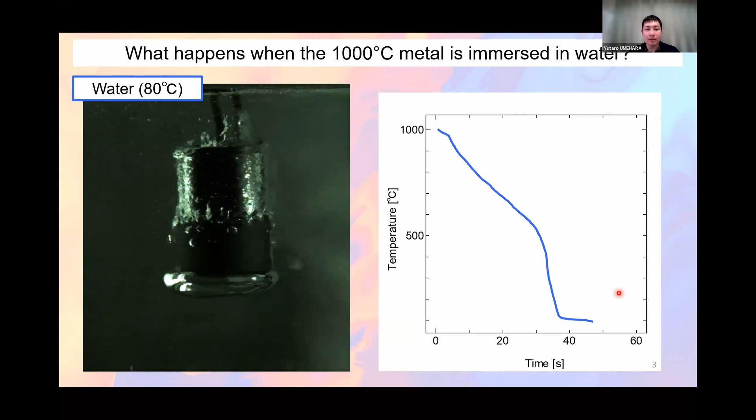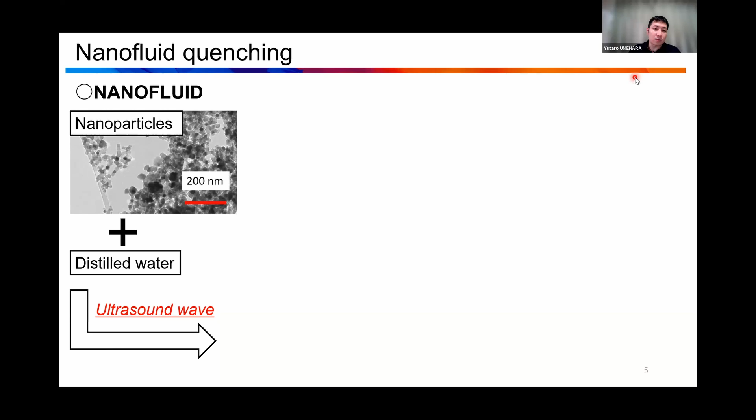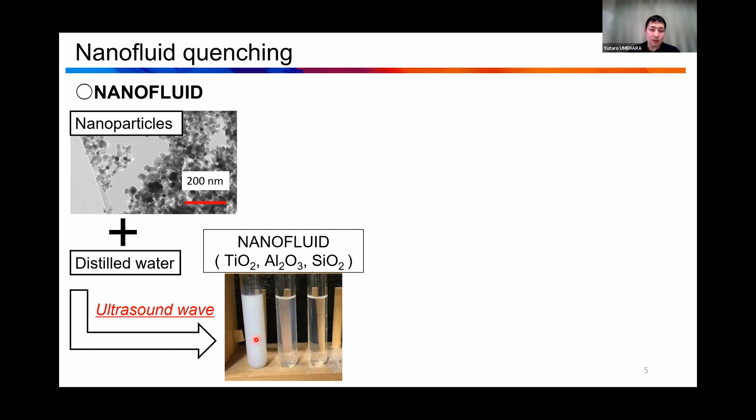Okay, so the first topic is this one, quench phenomenon in nanofluid. In a nanofluid, particles are dispersed in distilled water or oil or something. We made a nanofluid by using ultrasound waves to disperse nanoparticles in the liquid. These are titania, alumina and silica.

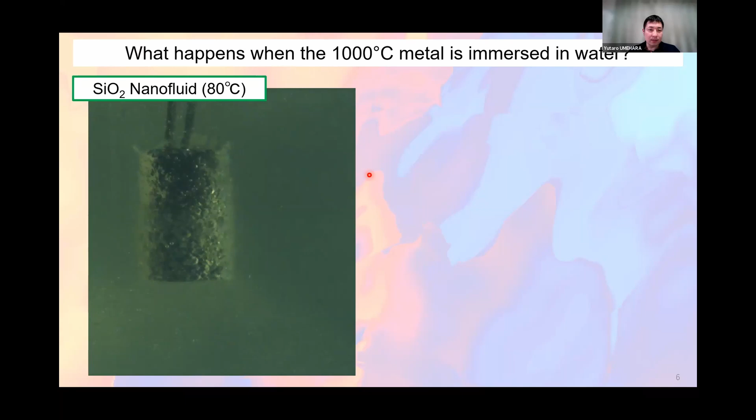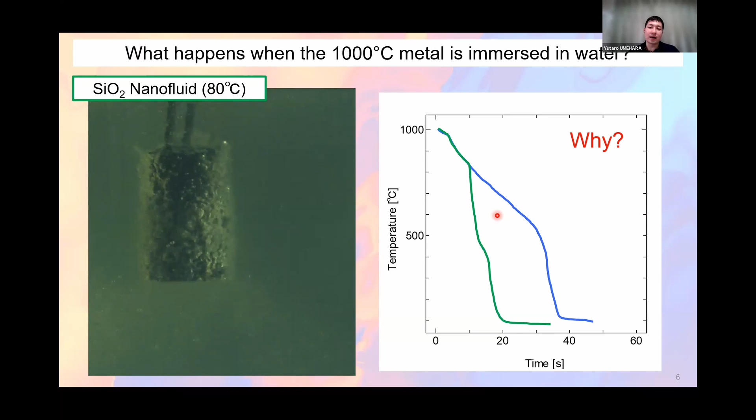So the next video focuses on quenching in a silica nanofluid. When a 1000-degree stainless steel rod is immersed in the silica nanofluid, the initial condition is film boiling. It's almost the same as the water case, and the vapor film covers the surface. But after that, suddenly the vapor film collapses to one point, and small bubbles are generated from the outer surface. So the cooling curve is like this: film boiling, and then suddenly the cooling rate is enhanced. So the research question is: why does this phenomenon occur in a nanofluid?

The reason is surface conditioning. Before quenching starts, the stainless steel rod looks like this, but when we repeat the test, heating up and cooling down repeatedly, the surface condition also changes.

So a nanoparticle layer is deposited on the surface during the boiling case. The nanoparticles are dispersed in a liquid, and during the cooling case, a bubble comes out from the solid, and the nanoparticles aggregate in the very thin liquid film layer, and then a nanoparticle layer is formed. So when we repeated the test, the nanoparticle layer formed like this.

So the main reason for the rewetting quenching phenomena is the nanoparticle layer. But why can the nanoparticle layer reduce the cooling time? So this is one mechanism. In the bare surface case, during film boiling, sometimes liquid-solid contact occurs, but heat comes from inside the high temperature surface, and then liquid boiling occurs, and then the vapor

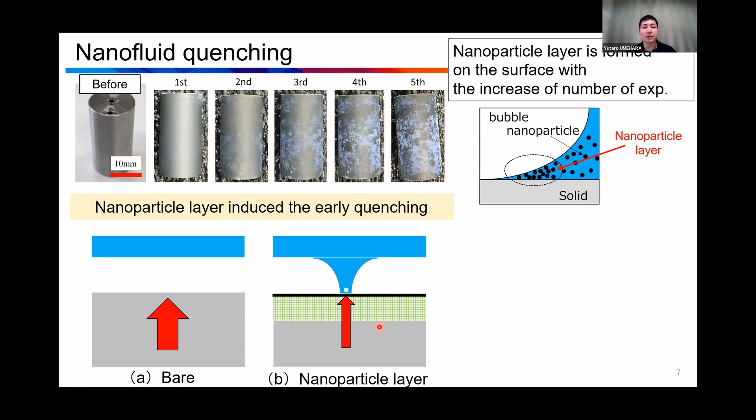film comes back. But when we apply the nanoparticle layer on the surface, liquid-solid contact occurs, but heat doesn't come so much because the nanoparticle layer has low thermal conductivity. So the liquid-solid contact is longer than in the bare surface case. Finally, the small bubble or film is collapsed. So the mechanism is the low thermal conductivity of the nanoparticle layer, and also the increased thickness is the main reason.

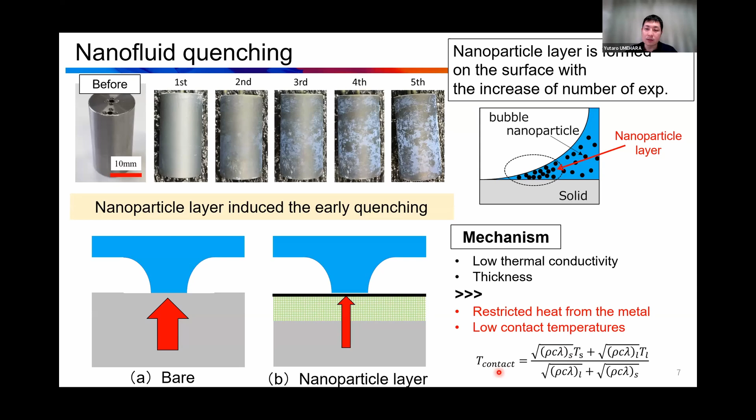Finally, the thickness and the low thermal conductivity of the nanoparticle layer restrict the heat from inside the metal, and then we get a low contact temperature. This is the main mechanism of the reduction of the cooling time when we use the nanofluid. The contact temperature is like this. Here is thermal conductivity. When we get a small value, we get a low contact temperature. And this low contact temperature induces rewetting quenching.

Okay, so a little bit of a change of topic: quenching phenomena in Japan. The Japanese sword is really important for quenching phenomena. Maybe someone knows the Japanese sword. The Japanese sword has a pattern on this side. This pattern is made by the quenching phenomena. When we make the Japanese sword, we add clay on the surface. This clay is very important to make the pattern. So this clay is like a nanoparticle layer. It has a very low thermal conductivity, so it can induce

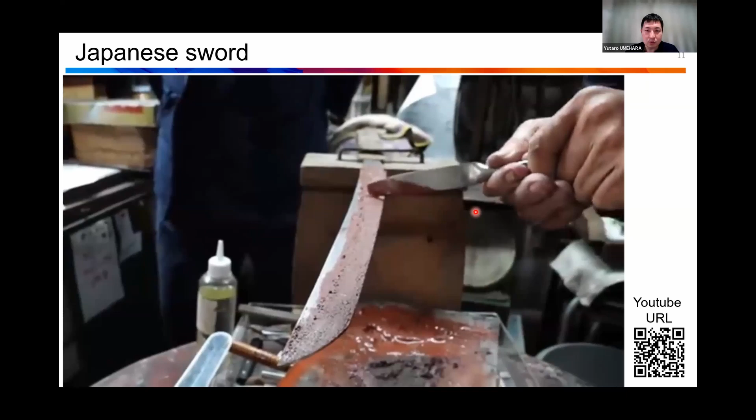rapid cooling. But they didn't just make the paste. They added a pattern on the surface. This pattern is very important to make the pattern of the sword. And they also chose a different material on the surface. This red one is the same, but they made some pattern. After that, they chose a different clay for a different side, because the spine side needs toughness, but the blade side needs hardness. So they chose clay with different thermal conductivity added on the sword.

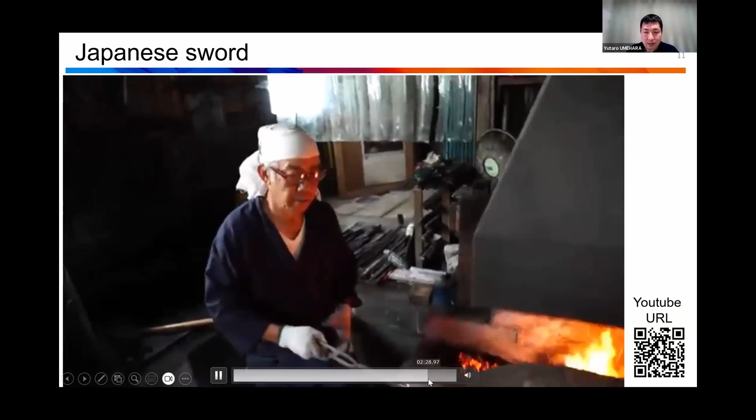And they also changed the thickness. After that, they heated up the Japanese sword to 1000 degrees C, and then quenched it completely in a water bath. So this quenching phenomena is very important to make a great Japanese sword, and also the clay pattern on the surface is very important to make this pattern on the sword. Okay, so this is quenching phenomena in Japan.

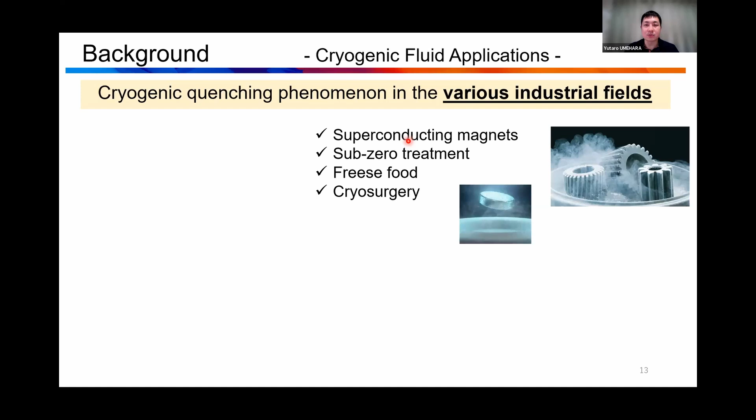Okay, let's move to a different topic. This is a recent research result on quenching phenomena in cryogenics. Cryogenic fluid applications can be found everywhere in various industry fields, such as superconducting magnets, heat treatment, food, or something like that. Especially, a liquid fuel rocket also needs to use cryogenics. Here is an image of the SpaceX engine, and here is liquid oxygen and liquid methane.

Those are cryogenic. So they need to transport them from the tank to here. The pipeline needs cooling down to the saturation temperature of the cryogen. And they also need to cool down all these components to the saturation temperature. So they need to spend so much waiting time for the fill of fuel. And they also need to use a large amount of consumption to cool down each component. So we need to improve the cooling condition with some surface modification, something like that.

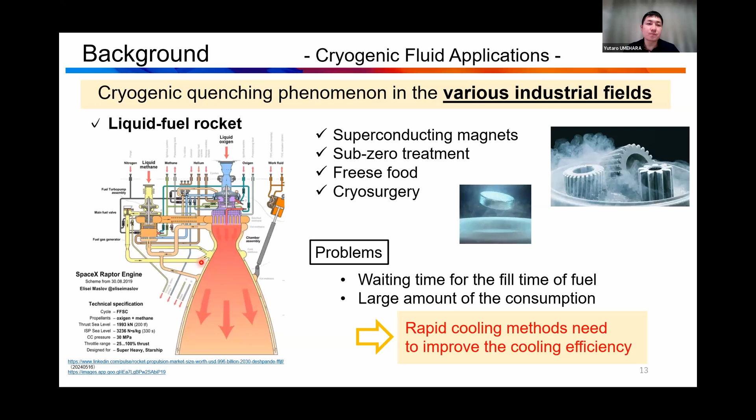So, previous research reported ways to improve the rapid cooling method and the cooling duration when using cryogenics. They reported anodic aluminum oxide: this is an aluminum substrate, and they added the anodic oxide. This nanoporous layer is very important to the enhancement of the cooling phenomena.

So this is the bare surface case, and the cooling curve is like this. And this is the boiling curve. But when we added this AAO surface, we can reduce the cooling time by 46%. And the boiling curve is here. This point is moved to the higher temperature point, and this is a 45% enhancement.

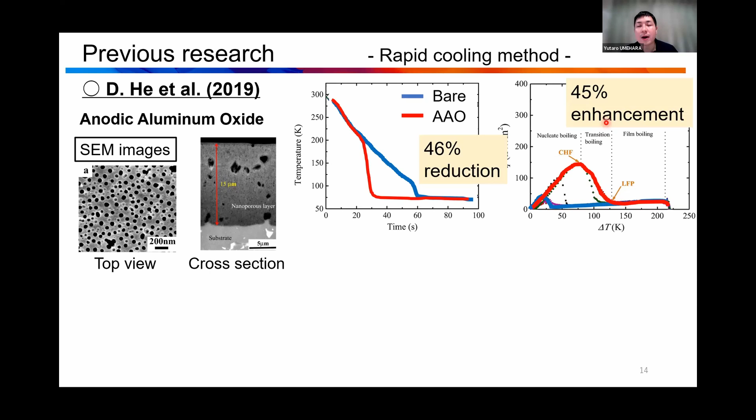So they reported that the mechanism of this is based on the contact temperature. Aluminum and the AAO surface have totally different contact temperatures because AAO is a porous layer, so it has low thermal conductivity. Finally they can get this kind of low contact temperature. So they reported this is the main mechanism of the rapid cooling.

But our research proposal is to develop a different rapid cooling technique by using the copper porous plate. So this one is a copper porous plate. This copper porous plate can enhance the critical heat flux. They also tried to use it to improve the cooling phenomena. This is the same image. This part is the porous part, and they also have big pores in the surface. So we try to use this to enhance the cooling characteristic.

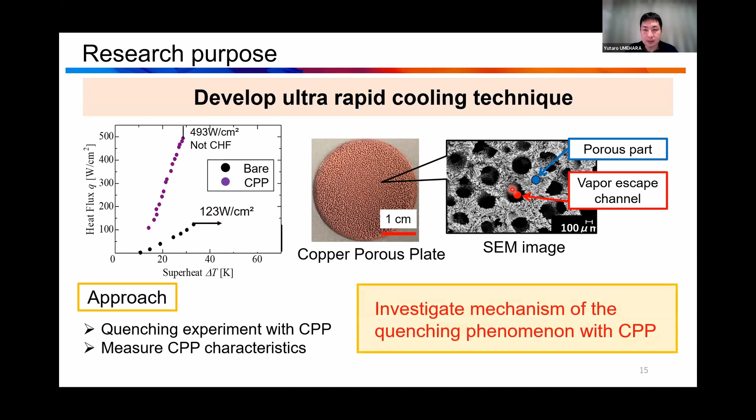So this is how to make the copper porous plate. We use an electrodeposition method. This method is usually used for plating, when we cover a metal with a layer of the same metal. Usually in plating they apply a very low current, but in our case we applied a very high current. So finally we get hydrogen bubbles from the cathode and the anode like this. At the cathode, copper flake is deposited on the surface, and hydrogen bubbles come out from this cathode. And finally, we get a kind of copper porous plate.

So this one is an actual video of making the copper porous plate. Hydrogen bubbles are coming out from the cathode, and finally we get this porous plate. So we apply this porous plate to the sample.

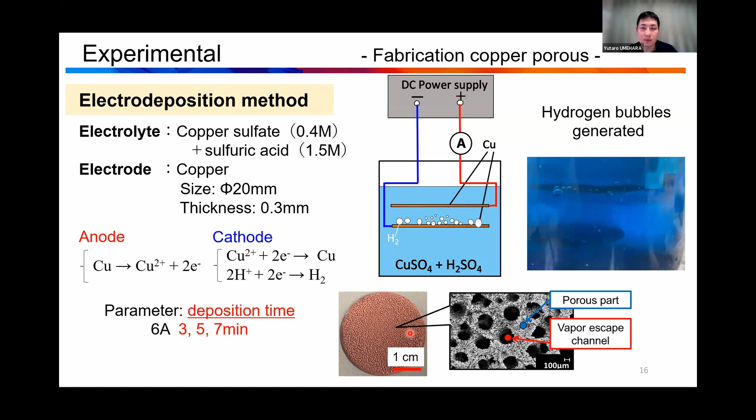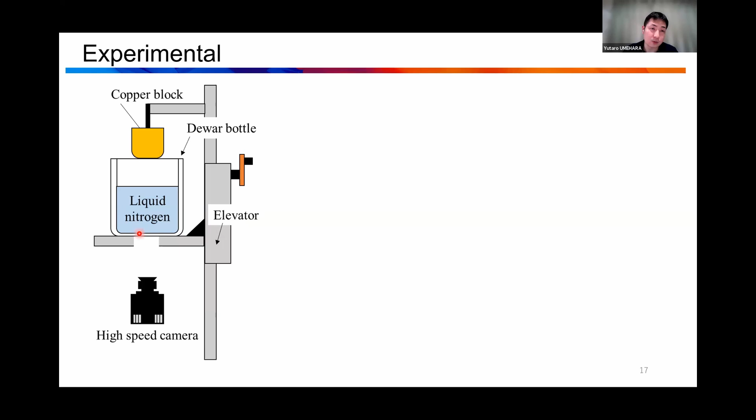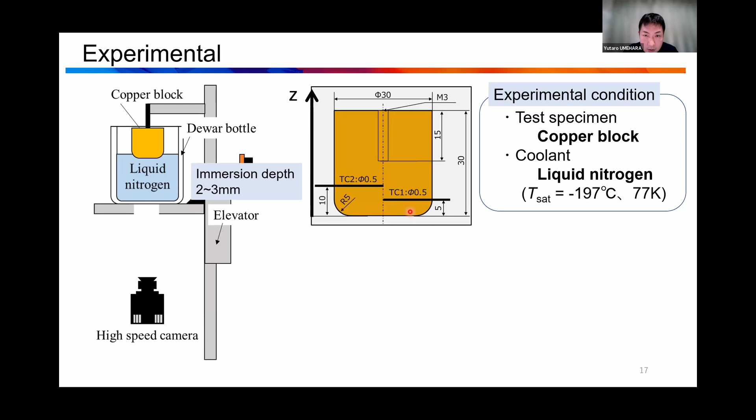So this is the experimental process. It's very simple. This is a Dewar bottle, and the liquid nitrogen is poured in here. And we use a copper block as the test specimen. The Dewar bottle is flat on the bottom surface to visualize quenching phenomena. The schematic design is like this, and we inserted two thermocouples in the middle part, here and here. During the experiment, the immersion depth is 2 or 3 millimeters, and we added the copper porous plate on the bottom surface using soldering adhesion.

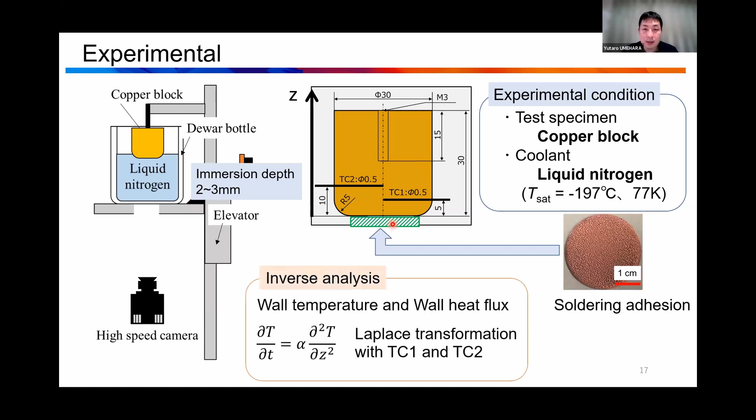And then we calculate the wall temperature and the wall heat flux by using inverse analysis, and we use a Laplace transformation to calculate them. So here is the experimental result, temperature versus time, and the bare surface case is like this. We spent almost 30 minutes cooling down to the saturated temperature of liquid nitrogen.

And then the next one is here. This one is a copper plate; we just added a copper plate. The thickness is 1.5 millimeters. In this case, we can reduce the cooling time by 40%. And then we added different copper porous plates, like this. We changed the deposition time to make the copper porous plate: 3 minutes, 5 minutes, and 7 minutes. When we increase the deposition time, the thickness also increases, but porosity doesn't change much. This one is a very good result: we can achieve a 90% reduction of the cooling time.

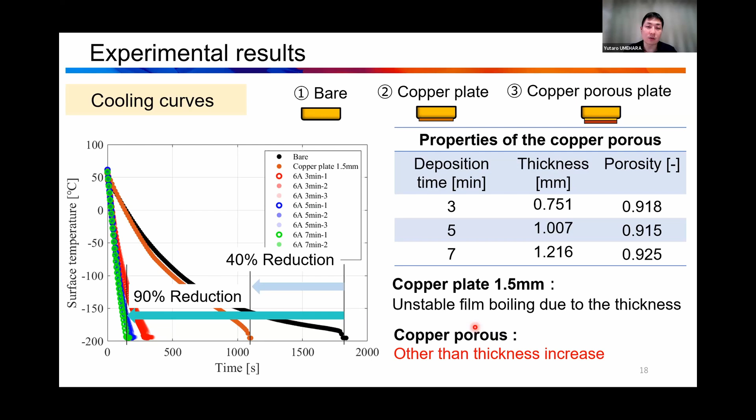Okay, so in the copper plate case, maybe the edge has some effect to reduce the cooling time, with unstable film boiling due to thickness. But in the copper porous case, the thickness is thinner than the copper plate, so maybe this effect is not so much. So maybe there is a different effect that improves the cooling characteristic.

Okay, the next is a boiling curve, heat flux and wall superheat. The black one is the bare surface case, and this brown one is the plate. So the heat flux doesn't change when we add this copper plate.

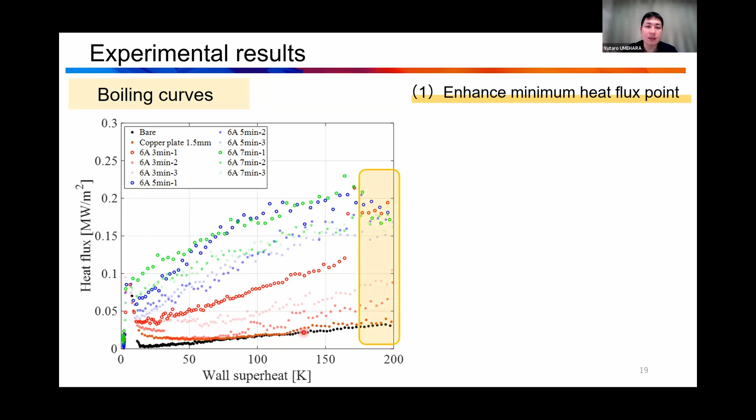But when we immerse the test specimen with copper porous, we can see a high heat flux just when it is immersed, when it has just started. Very high heat flux we can see, and then the next point is this point, the high wall superheat case. The bare surface has a very low heat flux, but the copper porous case has a very high heat flux, as it shows. So these two points are very important to reduce the cooling time.

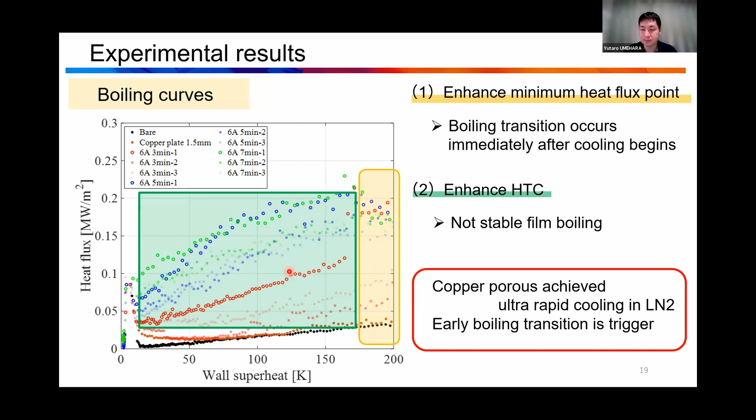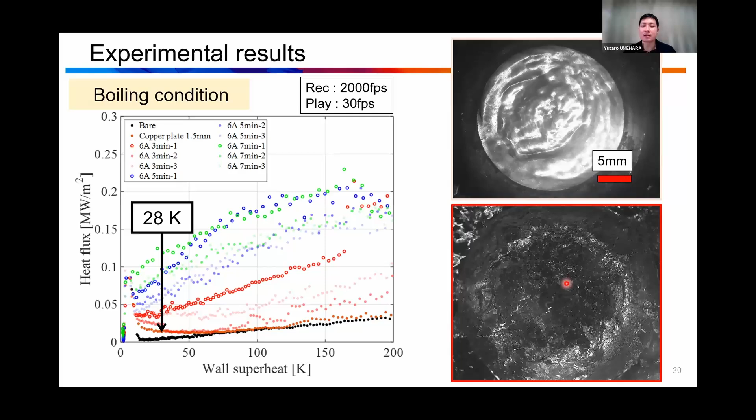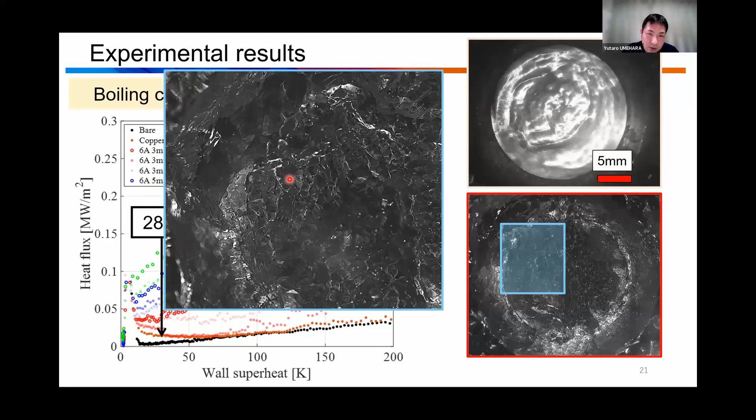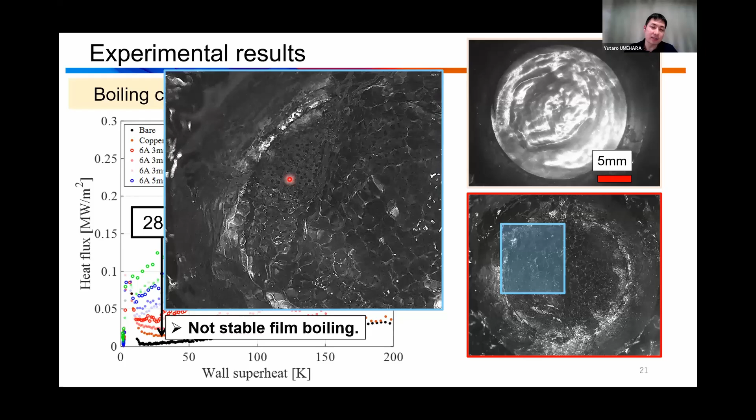At some point liquid-solid contact occurs, and then the vapor film is generated, but repeatedly liquid-solid contact, vapor film cover, liquid-solid contact, like this. So this is an expanded image. At some point liquid-solid contact occurs, but after that the vapor film suddenly comes out. So not stable film boiling, but for some duration they have some film boiling.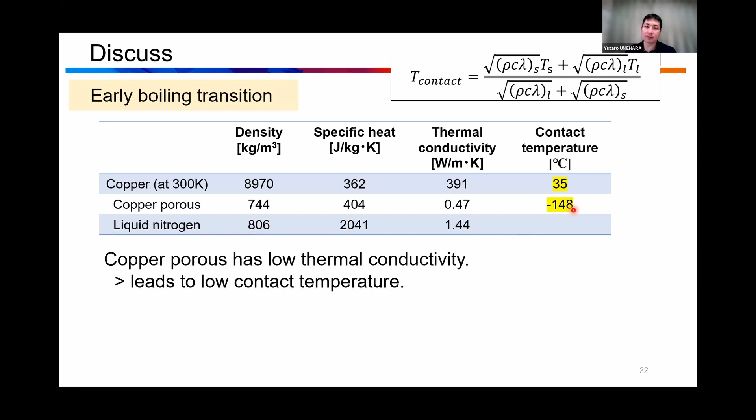So we try to understand the mechanism of this rapid cooling in quenching when we use copper porous. This one is the property of the copper, the copper porous, and the liquid nitrogen. Based on these properties, we calculated the contact temperature. In the copper case, the contact temperature is 35 at the initial temperature. But when we use copper porous, the contact temperature is very low. So this low contact temperature may have some effect on the rapid cooling.

But when we use different deposition times, 3 minutes and 5 minutes, the cooling time also changes a little because the heat flux is a little enhanced. So the next question: how does deposition time affect the rapid cooling? This is the same image when we make different deposition times. The pore size changes a little, and the thickness also changes a little.

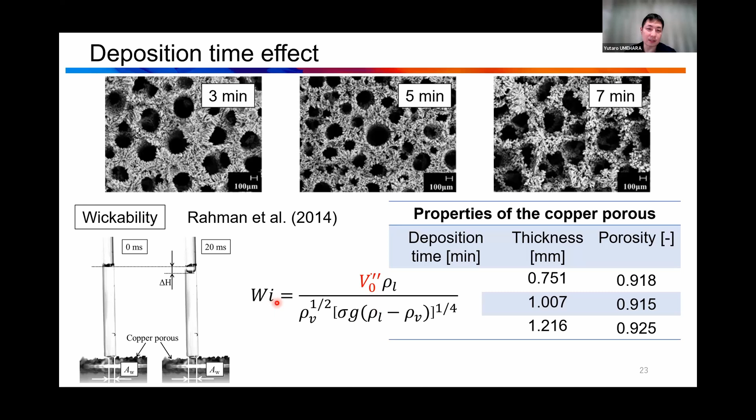So maybe various surface conditions also change, but we focus on the wickability of the surface. So we measure the wickability. For wickability, we attach a capillary tube on the surface, and the liquid level changes due to the capillary force of the copper porous. So this speed and time change, we measured, and this is the volume flux, and then finally we get this wickability value.

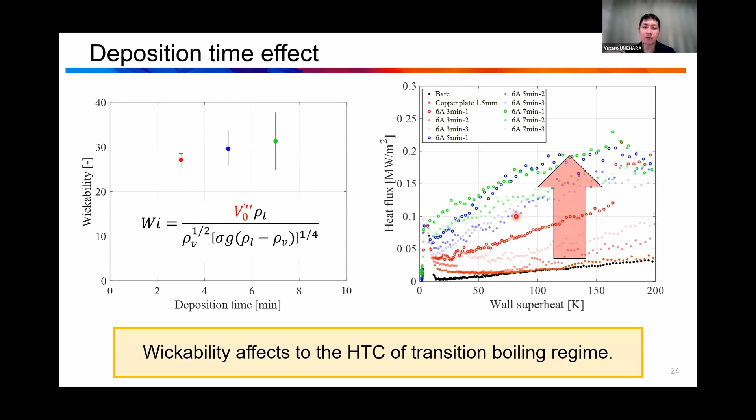So this is the result, wickability and the deposition time. When we increase the deposition time, the wickability also increases a little. So this may have some effect to improve the high heat flux and high heat transfer coefficient during the quenching in the high wall superheat range.

So this is a summary. When we apply copper porous to reduce the quenching time, the copper porous plate can achieve a 90% reduction of cooling time, because the low thermal conductivity led to low contact temperature, and finally we get an early boiling transition. Also, the deposition time affects the cooling time, because maybe wickability has some effect to reduce cooling time.

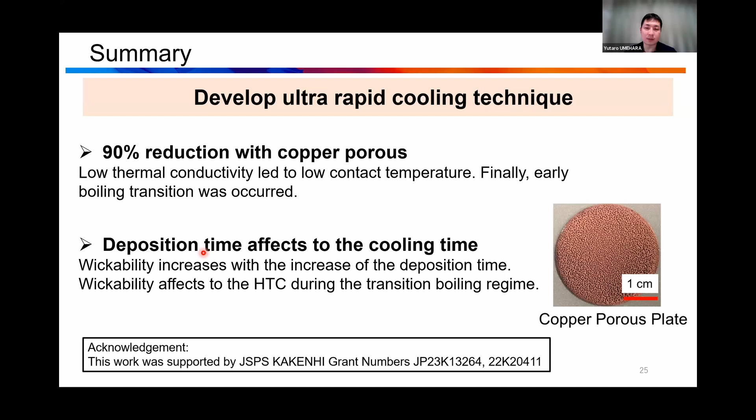Okay. So the next topic is the final topic of today's seminar: quenching phenomena near the liquid film front. When we flow down a liquid film along the high temperature wall, it's like this. We capture the actual thermal hydraulic phenomena with the high-speed camera, like this. Vigorous boiling occurred near the liquid film front, but here and downstream not so much, boiling just occurred at the front.

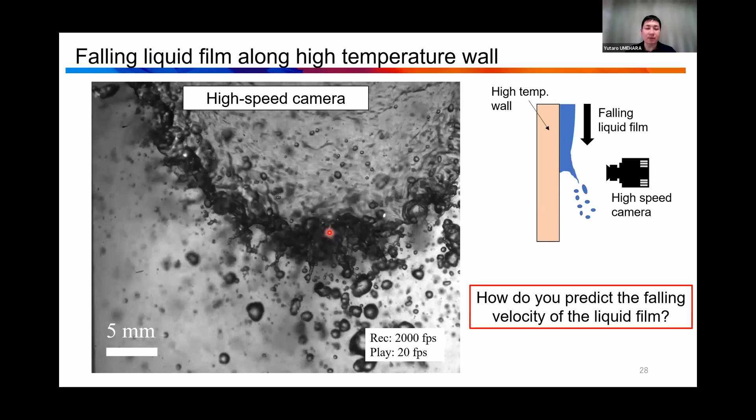So how do you predict this falling velocity of the liquid film? This is a research question. But we need to show some research background. So, emergency core cooling system in a nuclear power plant. This is a nuclear reactor in a pressure vessel.

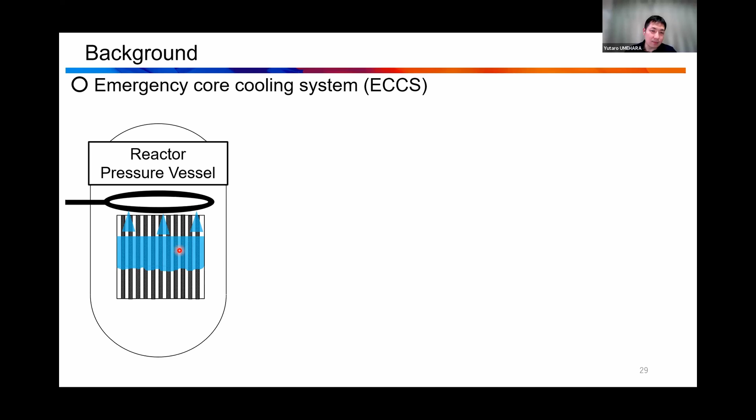And sometimes in an emergency situation, a severe accident occurs and liquid is vaporizing out. And the nuclear fuel comes into contact with the air. At that time, the emergency core cooling system is needed. So in that case, the liquid comes from the top, and then we get a falling liquid film.

So it's like this: the liquid film comes from the top, and then quenching occurs here, and the liquid film front moves like this. But sometimes boiling occurs, and then the liquid film front is apart. This situation repeats, and finally the liquid film completely covers the fuel rod. But we need to predict the falling velocity of the liquid film.

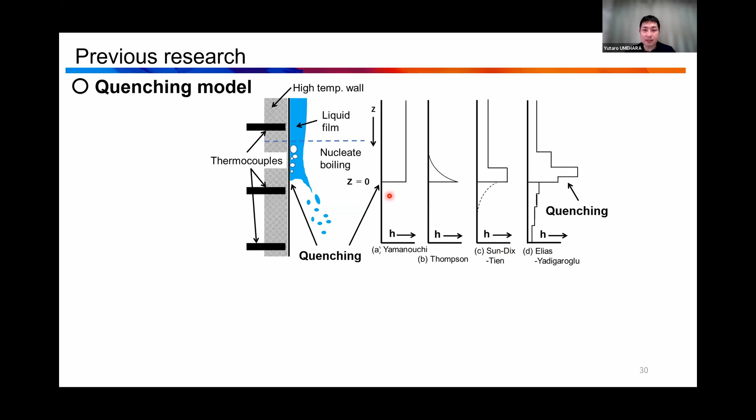So to predict the quenching velocity, we need to make a quenching model. The quenching model is an HTC distribution near the liquid film front. Previous research reported various quenching models and suggested new ones. So this is the liquid film, here is the liquid film front, and this is the quenching point. They reported a heat transfer coefficient distribution like this: a constant heat transfer coefficient, but suddenly zero after the quenching temperature.

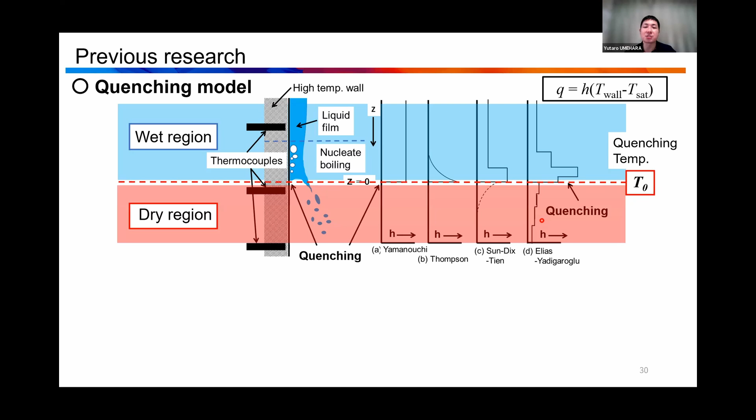But the other one slightly changes the heat transfer coefficient distribution. They called this region the wet region, and this region the dry region. Their quenching model is composed of three components: wet region, dry region, and the quenching temperature. And finally, they added an HTC distribution. So we get a quenching model, and we can solve the heat conduction equation using this quenching model as a boundary condition.

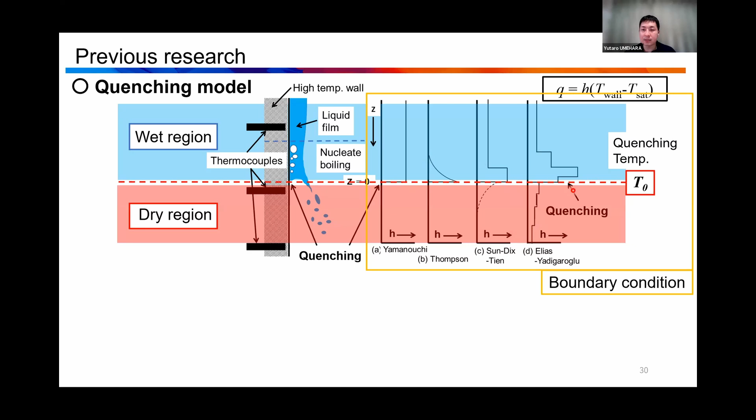But this quenching model has some problems. One is that the model assumes the HTC distribution and values. Because they used just thermocouples, they can get only local temperature data, so they cannot measure the temperature distribution. That is why they cannot measure the actual heat distribution.

Number two is the model did not consider the liquid film condition. Actually, the liquid film is repeatedly wet and dry, and vigorous boiling occurs at the liquid film front. The vigorous boiling causes a non-uniform liquid film condition, but they did not consider the liquid film condition. They just applied some value to make the HTC distribution.

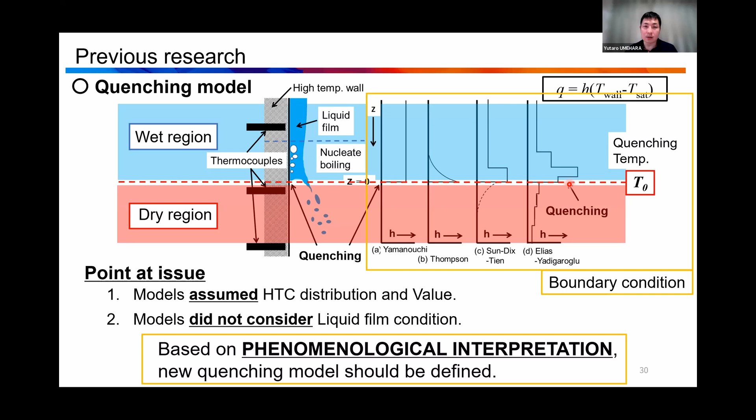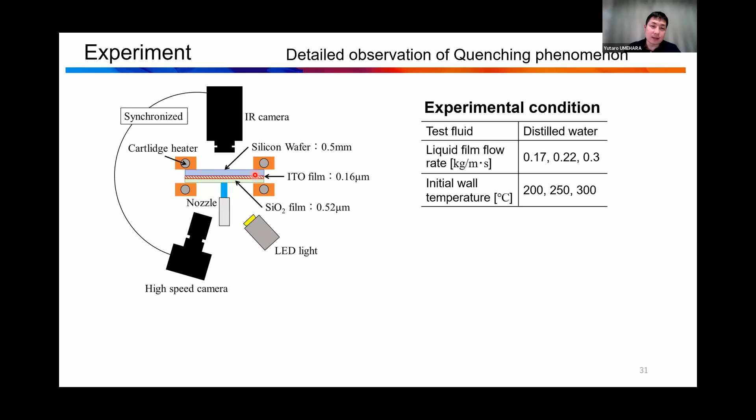Our research motivation is based on the phenomenological interpretation. We try to make a new quenching model. That is the objective of my research. We set up the experimental apparatus to measure the actual temperature distribution during the quenching phenomenon by the falling film. We used a silicon wafer as a high temperature wall, and added an ITO film, because silicon wafer is transparent to infrared light and the ITO film is opaque to IR. So we set the infrared camera on the back side and can directly see the temperature distribution.

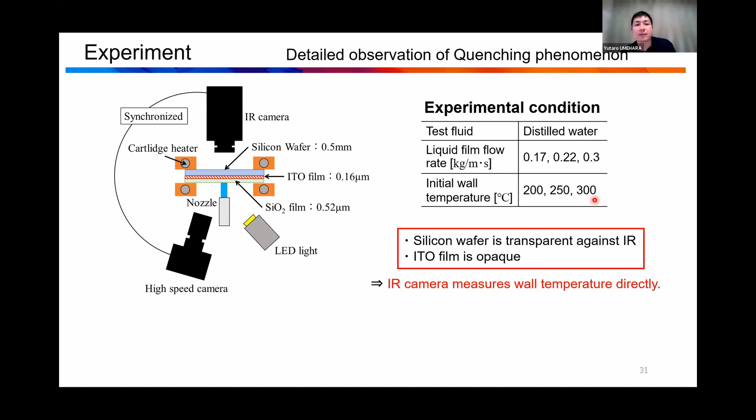Sorry, this schematic design is a top view. So the silicon is here, the liquid film comes from here, and then we make the falling liquid film. We observe the liquid film condition using the high-speed camera, and the high-speed camera and the infrared camera are synchronized. The experimental condition is like this: initial wall temperature is 200 and the maximum is 300. And the liquid flow rate is like this.

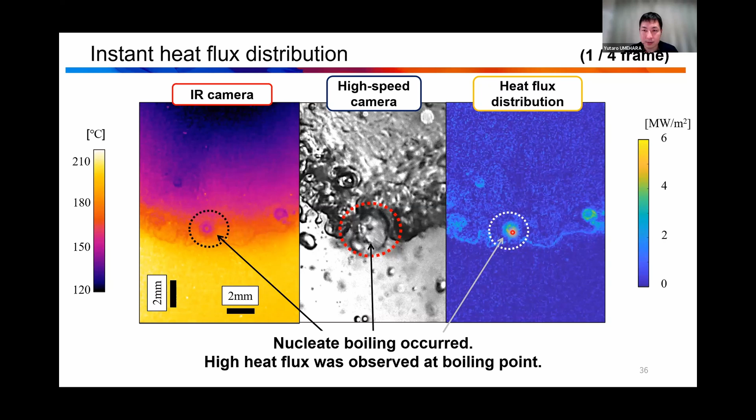Okay, so we focus here on the edge of the ignition point. We can find nucleate boiling occurred near the surface, near the ignition point. There we can observe the high heat flux at the boiling point. And then the bubble is growing, and the high heat flux area is expanded like a ring.

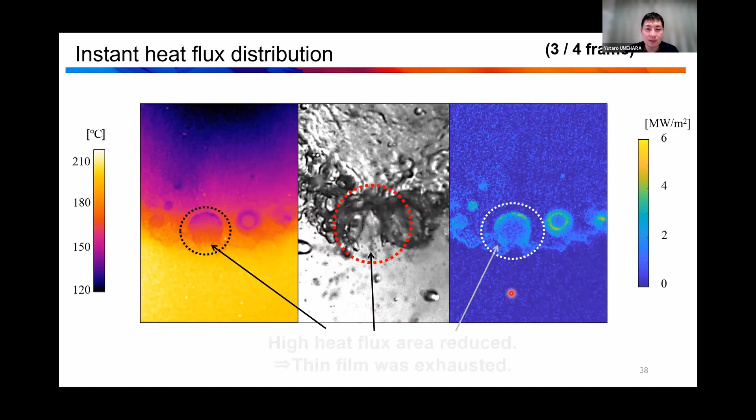Yes. So maybe this one depends on the thin liquid film layer at the bottom of the bubble. It pushes back the liquid film, and then the thin film is exhausted. And finally, it's completely dried out and the dry spot is coming out. So then we cannot see any high heat flux point. Okay.

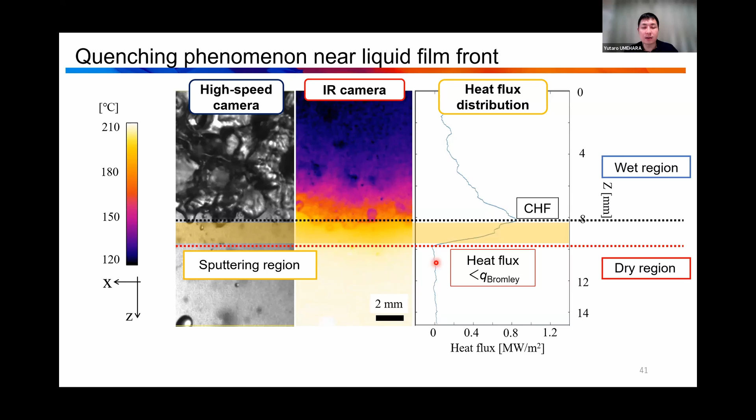Okay, this point is the critical heat flux point, and previous research reported this region as a wet region, and here is a dry region. But we added this region, called a sputtering region, before the heat flux is almost equal to zero. And please focus on this range in this movie.

Okay, so in this sputtering region, wet and dry repeat. The condition was repeated due to the nucleate boiling. So boiling occurred and the liquid film is moving down, but after the bubble is coming out, we can see some completely dried positions. So in the sputtering region, dry and wet conditions were repeated.

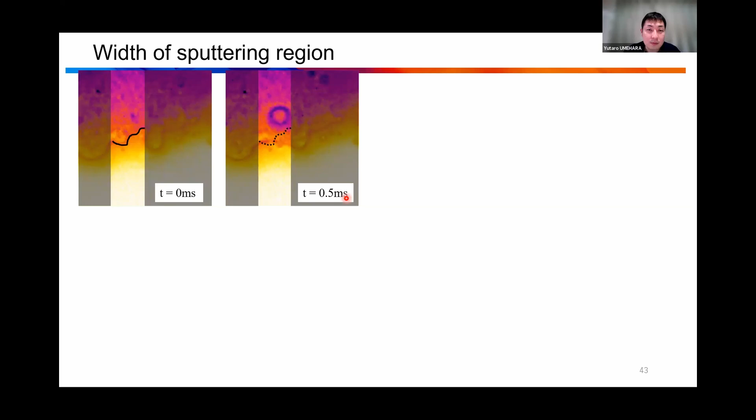So next, based on this experiment result, we try to make a new quenching model. So maybe the sputtering region is very important to predict the quenching velocity. So here is a liquid film front. This one is 0 milliseconds, the next one is 0.5 milliseconds. So this part is a liquid film front, but a bubble is generated from here and the liquid film moves a little bit. So this bubble is related to the development of the liquid film front.

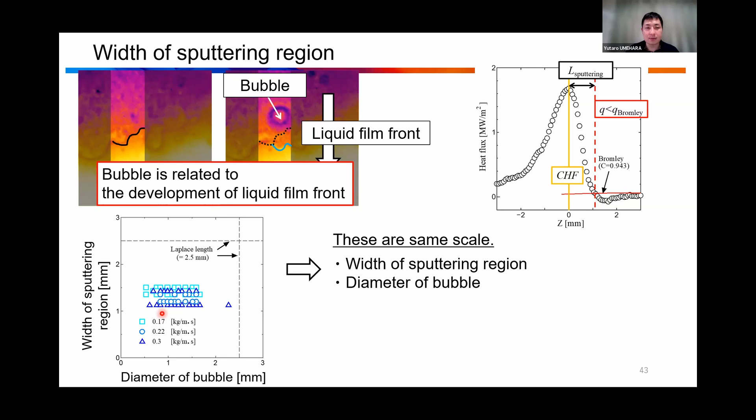So we compare this bubble size and the actual average heat flux distribution in this area and the length. With the average, we cannot get so many values of the width of the sputtering region, but during the falling film in one experiment, we can get many bubble sizes. So we compare on this scale. The width of the sputtering region and the bubble diameter are almost the same scale. So finally, the width of the sputtering region is determined from the bubble size near the front.

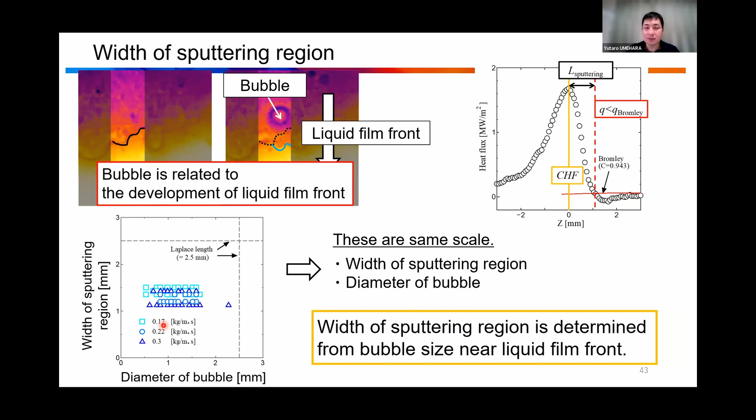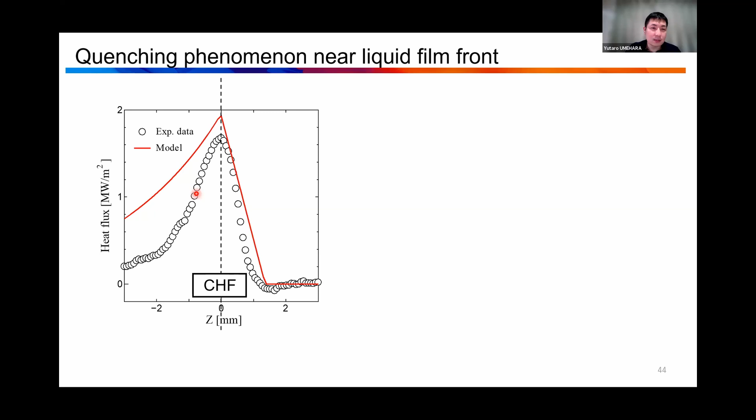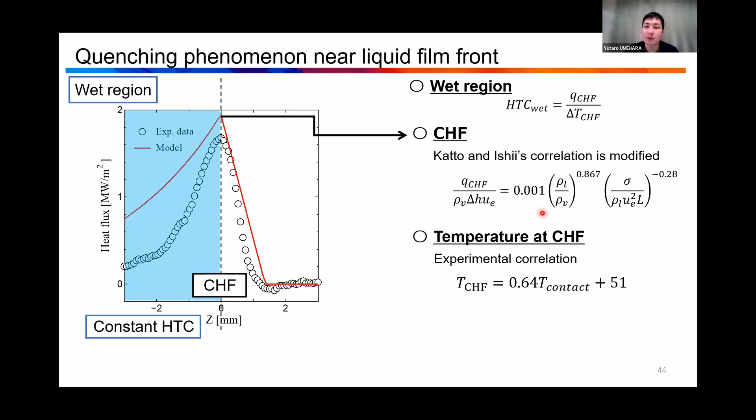So based on this result, we finally made a new quenching model. The red line is the model, and the black dot is one of the experimental data. So this one is a wet region, and we added a constant heat transfer coefficient. And the next one is the critical heat flux point. We used a correlation reported in previous research and modified it a little bit.

And then this one, the sputtering region. We make a correlation by using a Laplace length, and finally we define this value from the experiment. And then this one is the dry region, and the heat transfer coefficient is almost zero.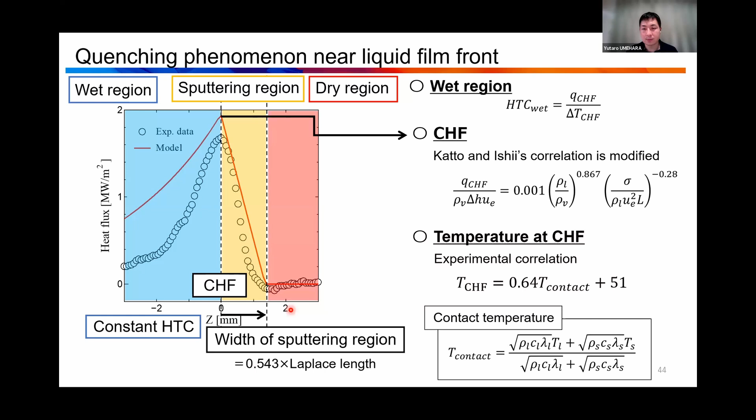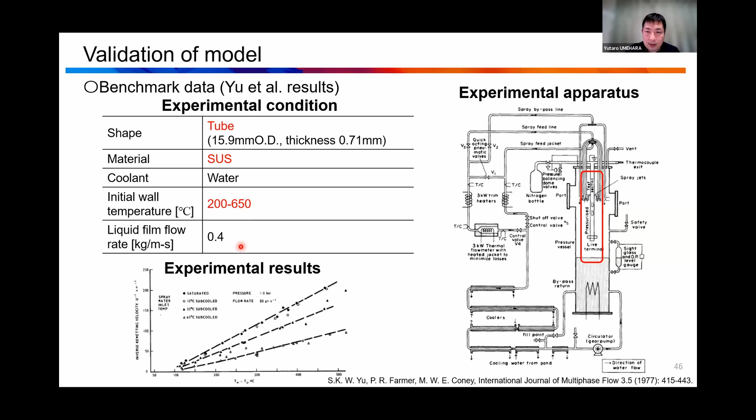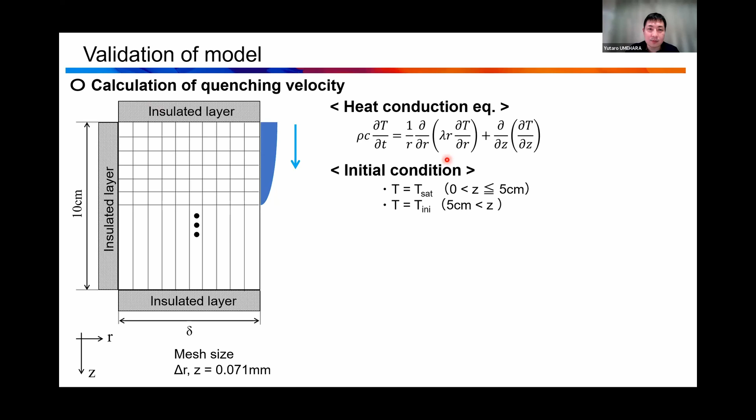So, okay, validation of this new quenching model. This one is benchmark data, a stainless steel tube, at a little higher temperature than in our cases. And then we validate our model. This is how we validate our model: to calculate the quenching velocity, two-dimensional heat conduction is solved with our quenching model added as the boundary condition. And finally, we calculate the quenching velocity and the displacement of the critical heat flux point.

So finally, this one is the result: wetting velocity, calculation data, and experimental result. The triangle data is the Yamanouchi and Duffey model applied case. They have a very big error because they didn't consider the actual phenomena. That is why they have a big error. But in our case, the error is 30%. So this model is based on the actual phenomena and a regression. So this is the conclusion and the final new rewetting model.

So first, we found the main factor of the heat transfer is nucleate boiling. Nucleate boiling dominated heat transfer near the liquid film front. And the second one is we found a relationship between the heat flux distribution and the hydrodynamic phenomena. And based on these two findings, finally we made the phenomenological model.

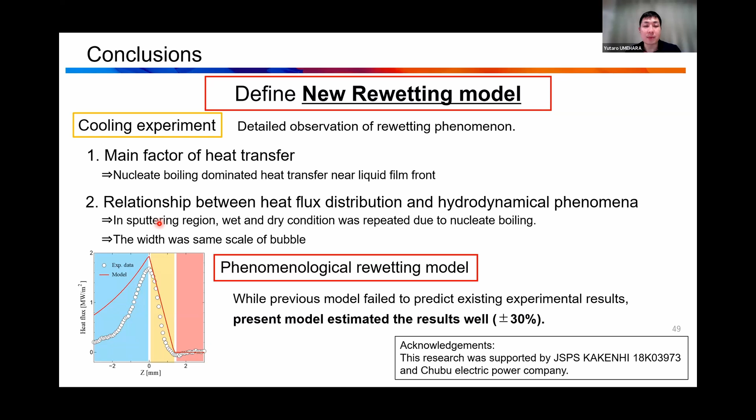So finally, I just show some beautiful images from our laboratory. Our laboratory focuses on very different hydrodynamic phenomena, and the critical heat flux, and we apply the electrodeposition. It's also the onset of nucleate boiling. Yeah, it's a beautiful image of analyzing some hydrodynamic phenomena.

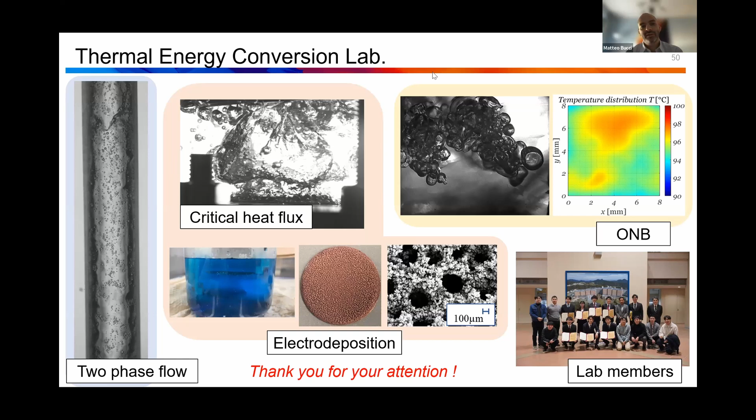Yes, this is Matteo speaking. Yutaro, first of all, I have to say this was a wonderful talk. So thank you very much for taking this invitation and showing us your work. I have a couple of questions and perhaps a curiosity.

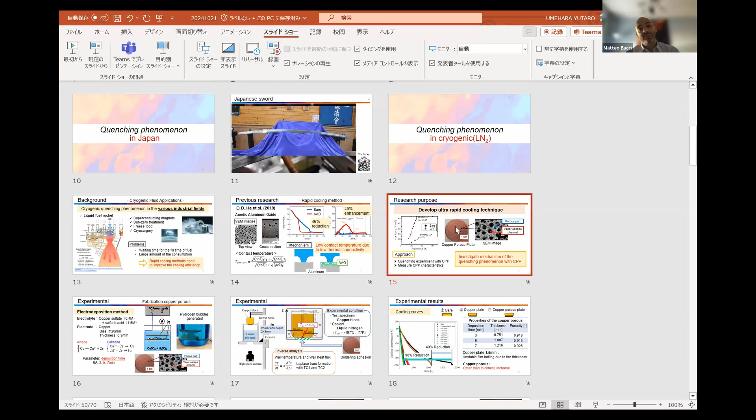When you do the copper, essentially it's an electrodeposition of copper. Is there any process that you could use to create a structure such as this one, but on materials that have less conductivity than copper? So you basically do a plating of something which is less conductive. Yes. So when we made a high porosity, this one is almost 0.9 porosity, so that's why the very low thermal conductivity, because we use a copper case. Okay.

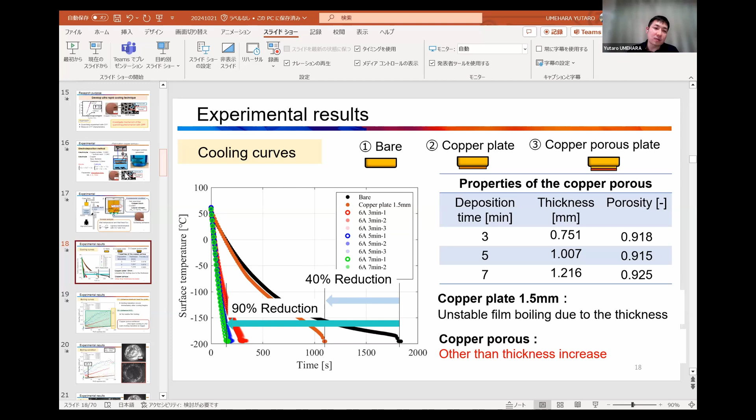But can you use, for instance, nickel instead of copper? Yeah, of course we can. Already in some industrial fields they use very different metals with the plating method. So maybe we can use a different metal to make this kind of porous structure, maybe with the same method. So the block itself was copper or was stainless steel? I can't recall. The big block you were trying to cool was copper or stainless steel?

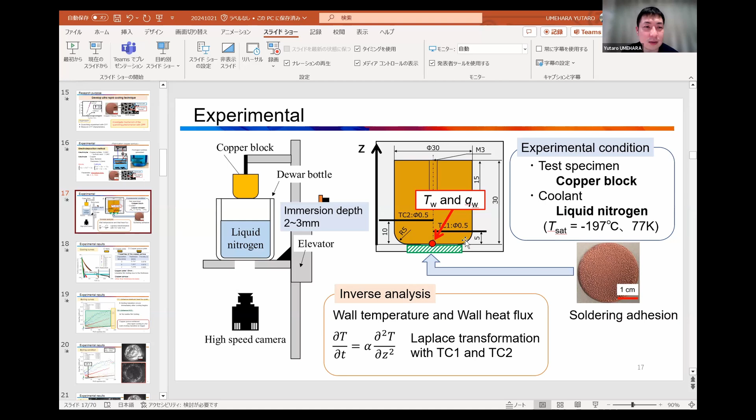What do you mean, in our research? Yeah. In our research it was a copper block. But yeah, actually we directly make the porous plate on the surface when we immerse this block in this. Thank you, Yutaro. Yep.

Okay. We have somebody raise their hand. Please go ahead. Thank you. My name is Jubair, and I actually moved from Japan to the US this year, in May. So yeah, that's a very nice presentation, and I think your model predicts very well. So I have one question, just out of my curiosity.

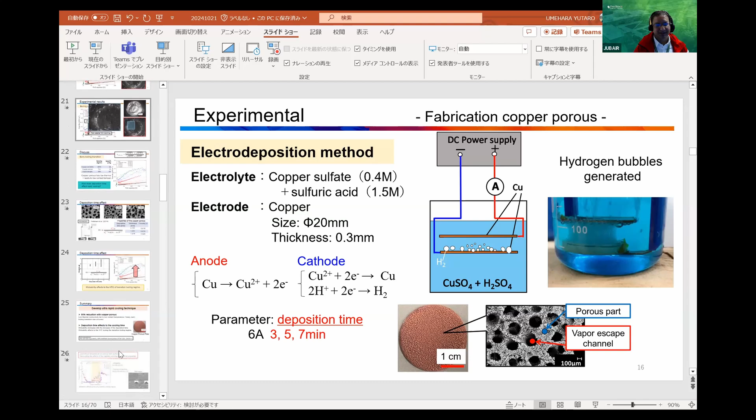So it's not related to the boiling, but about the IR camera results you have shown here. Previously I was trying to use this IR camera for the freezing of a droplet, and I was trying to determine the droplet temperature during the freezing process, but I was encountering lots of problems like the liquid transparency or the substrate background. So I could get the difference in the temperature zones, like this is a higher or lower temperature area, but the numerical values were not correct.

So yeah, I couldn't figure out how to overcome that for that application, but for this application, have you experienced some difficulties or have you used any special technique? Especially, I think it's also liquid and the substrate might affect your temperature numerical value. Yeah, that's my question. Okay. Thank you. Yeah, thank you for the question.

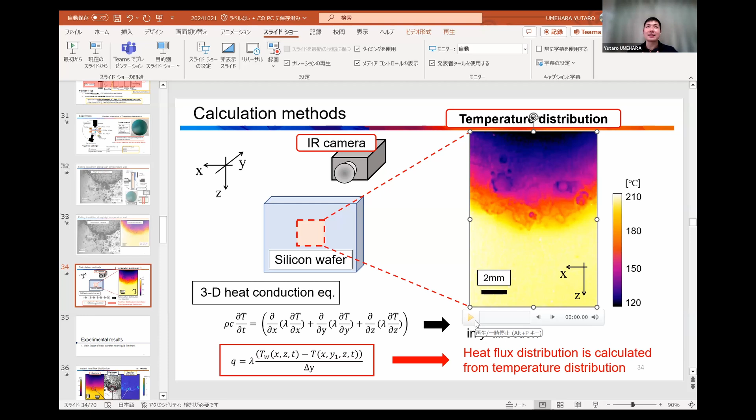Maybe I think there are two points. The first point is we need to add some opaque layer to measure the surface temperature directly. So we added the ITO film to cut the infrared ray, because when we didn't use this ITO film, we can observe a different surface, not just the bottom of the water film layer. So maybe we cannot get the correct value.

So I think when we want to measure the surface temperature, maybe we need to add some opaque layer against the infrared light. Okay. And second, with this ITO film, your boiling characteristic is changed.

I mean, yeah. Of course, when we add surface modification, the film has low wettability, I think. So that's why we added the silica film on the surface, to make a uniform liquid film front. I see. Okay, thank you.

Okay, a second point is, when we measure the low temperature case, maybe an infrared camera is not good to measure the low temperature area. I see. Okay, thank you for this. So yeah, actually for my case, the superhydrophobic contact angle changes if I do some modification. So yeah, that was the main challenge. Anyway, thank you.

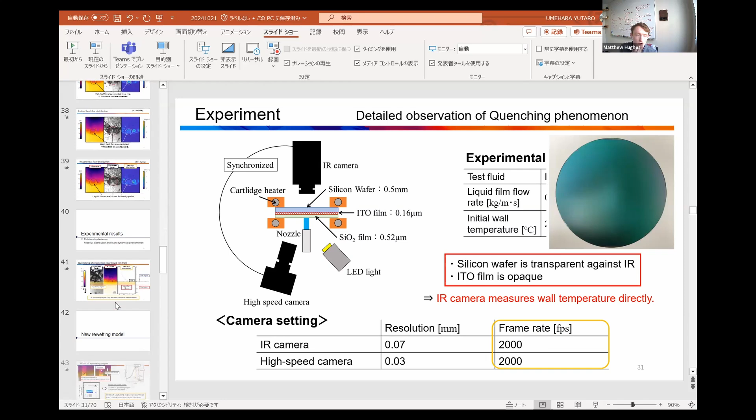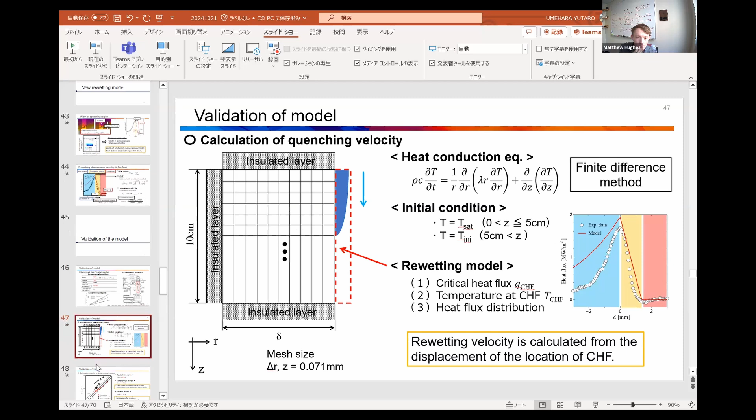If not, I have a very quick one just on the model validation. So I saw your plot on the comparison of your model validation compared to, I think, a previous work. Maybe it was 2 slides down, if I remember correctly. Yes, this one, that's right. Could you go 2 more down to slide 48, I think? Yes, this one.

So you're calculating the velocity, the quenching velocity, basically. This is what the validation is showing. So I was curious, you have the IR technique to show you the sputtering region and the other things. From your understanding of the model that you developed, what was the most important parameter that seemed to affect the quenching velocity itself? Was it the sputtering region, or were there other informations you obtained from the IR measurements that also really helped with your predictive accuracy?

Okay, thank you for that question. So actually, the wet region and this heat transfer coefficient don't so much affect the falling velocity, but this sputtering region and the critical heat flux value is very important. Of course, and the temperature at the CHF point here. So when we calculate the heat conduction equation, we change the heat transfer coefficient distribution due to this temperature. So this sputtering region and this inclination also change when we change the critical heat flux, and when we change the temperature at CHF.

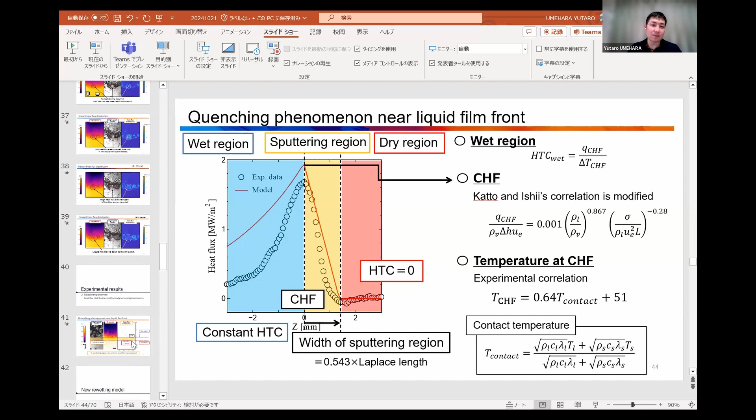So this one and this length are very important too, to predict the accurate falling velocity. I see. So previous models don't consider the sputtering region, but our model does. That is why our model has good results. Okay. Yeah, thank you.